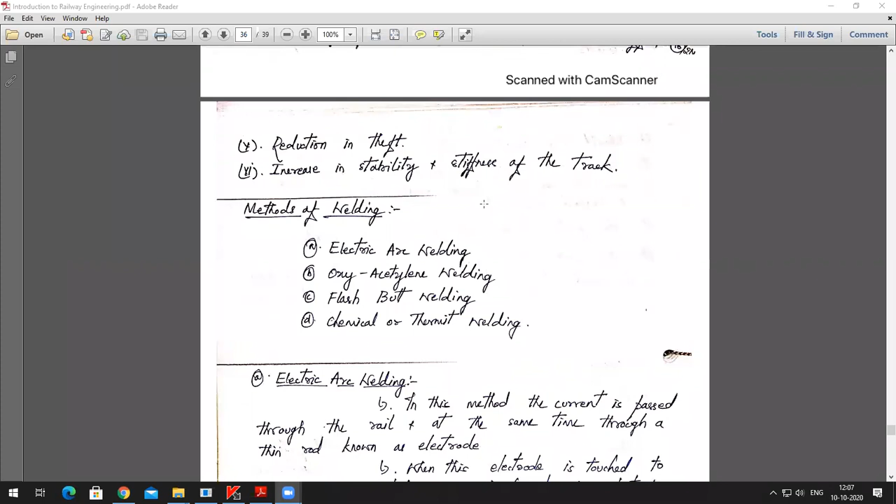Okay, so today we were supposed to discuss the various methods of welding of rails. In the previous class, if you remember, we had discussed the purpose of welding of rails, and then we discussed the advantages of welding. Now we shall be discussing the methods of welding that are available with us.

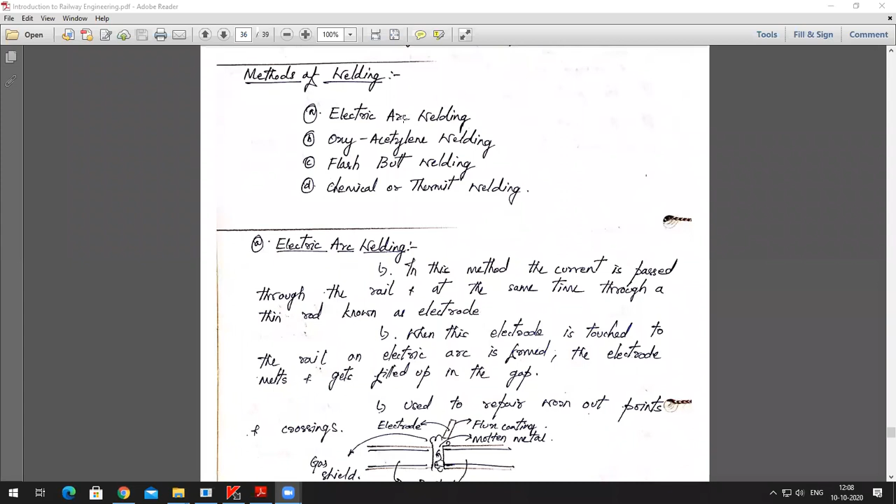Right. So there are basically four popular ways with which the rails can be welded along a railway track. The first one is electric arc welding. Second is oxyacetylene welding. Third, flash butt welding, and then chemical or thermite welding. So we shall be discussing each one of these in detail in this class. Okay, so let us begin with the first one, that is electric arc welding.

So what actually happens in this method is that the current will be passed through the rails and at the same time through a thin rod, which is popularly known as the electrode. So when this electrode is touched to the rails through which the electricity is already passed, the electrode actually melts and gets filled up in the gap between the two rails.

That heat would be more than enough to melt the metal that is there inside this electrode, and that's how the molten metal gets filled in the gap, and then it will start binding these two rails together, and then the excess material will be chipped off or it will be ground.

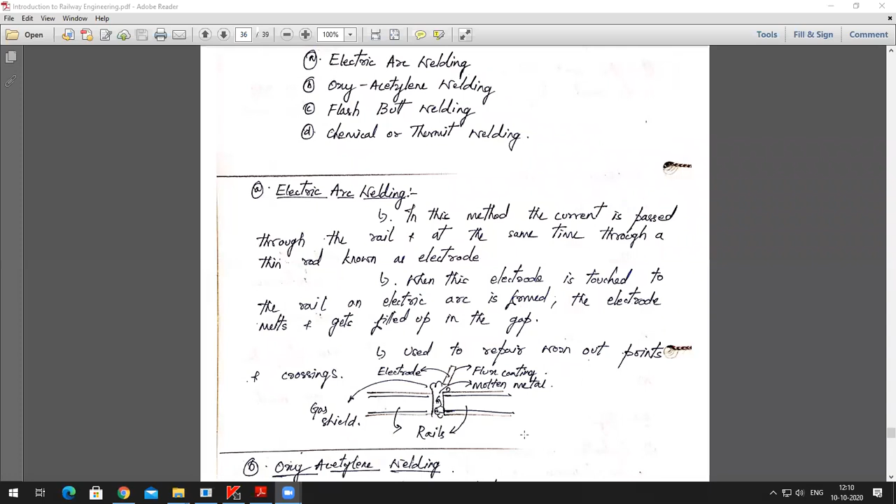Okay, so this technique is basically used in joining the rails, and it is very convenient to even repair worn out points and crossings, or even sections of the rails which have deteriorated over time. All right, so this is about electric arc welding. I'll try showing you a video on how this electric arc welding is actually done.

Is everyone able to see the video? Yes, sir. Is the audio of the video also audible?

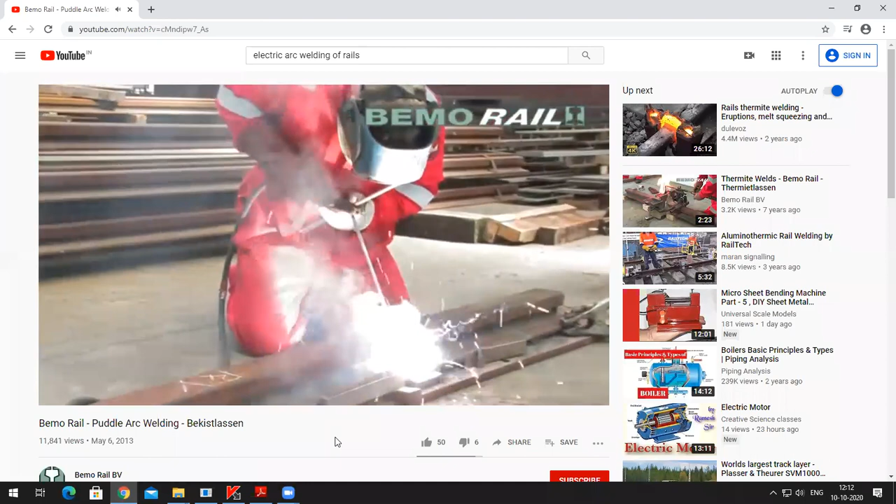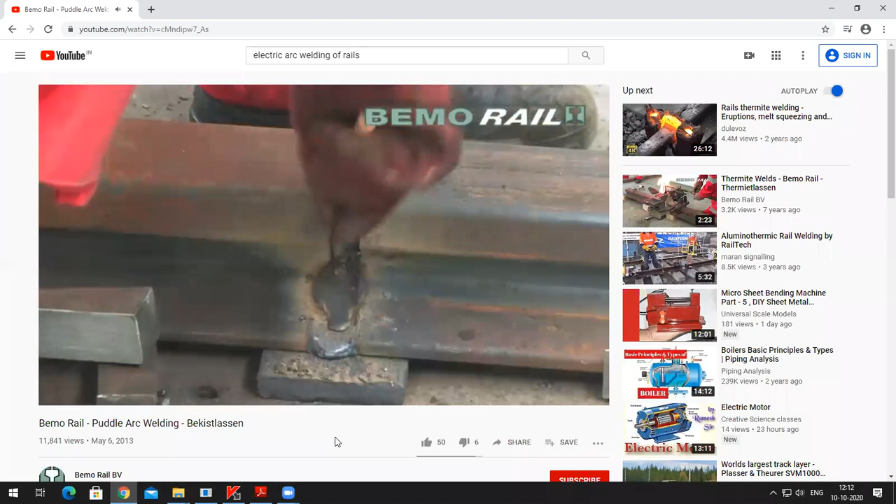So these are the electrodes. See, that's how the metal will be filled in stages, and those are the molds which will be put so that the molten metal doesn't fall apart.

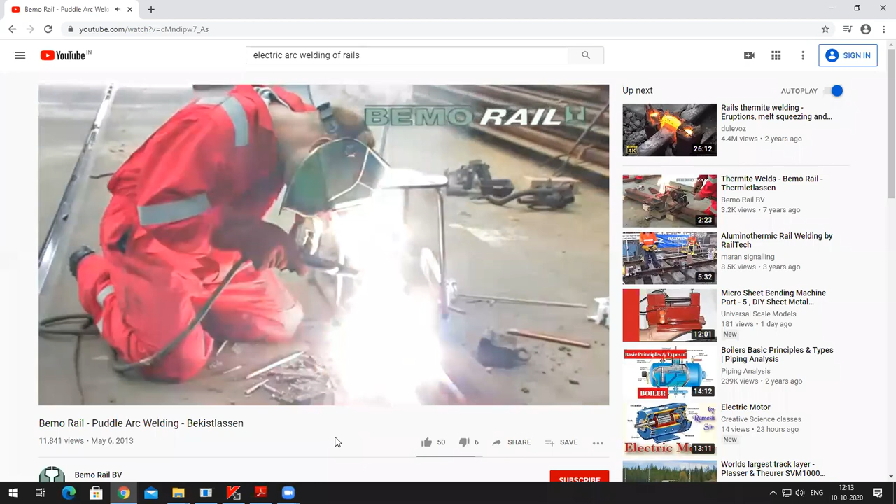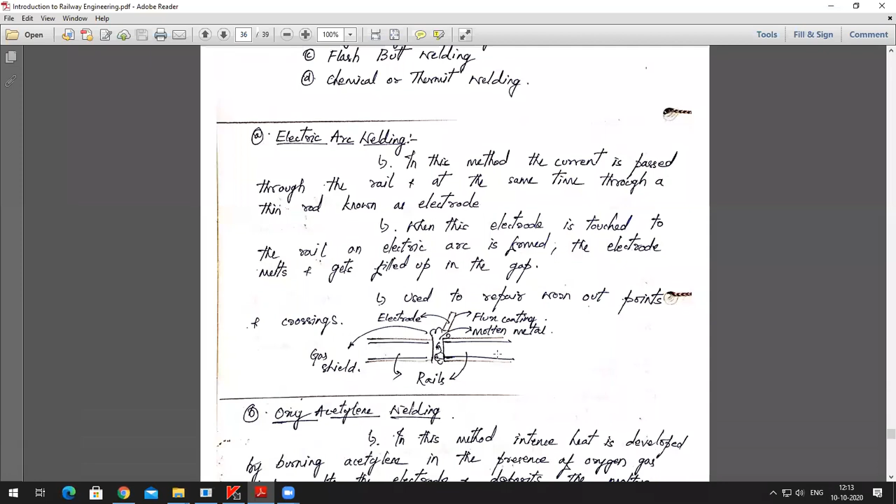So you could see how the electric arc welding is done by using the packing that we provide on the side, so that the shape of the head and the web gets retained. Okay, so that was about electric arc welding. Next is what we call oxyacetylene welding.

So in this technique, a huge amount of heat would be developed by burning acetylene in the presence of oxygen gas, which will melt the electrode, and it deposits the molten metal in the gap between the two rails which are supposed to be joined. Okay, so this is similar to electric arc welding. I'll just see if there is a video on it.

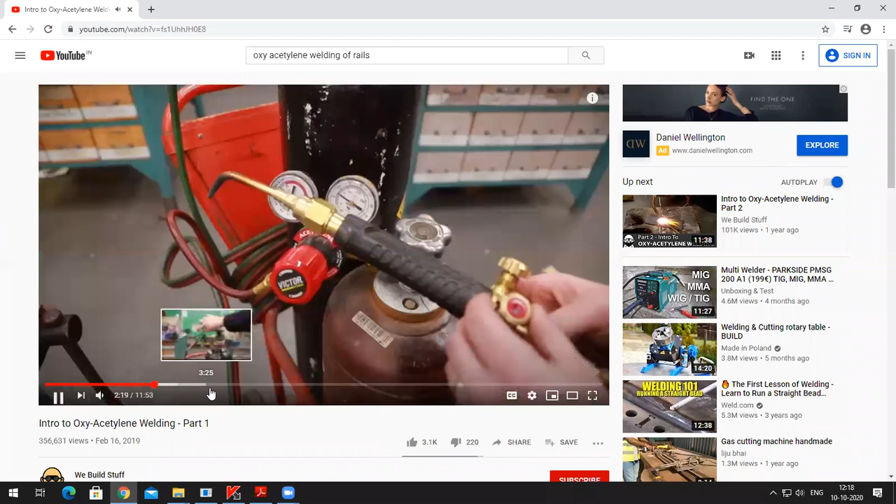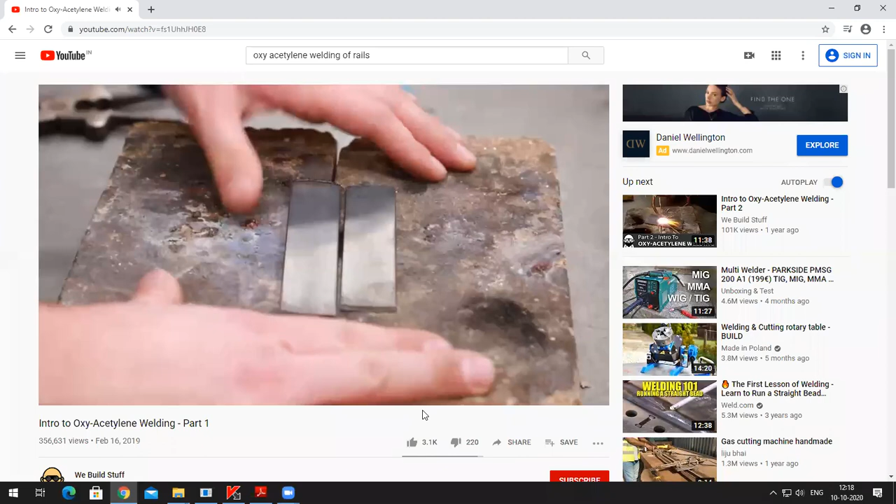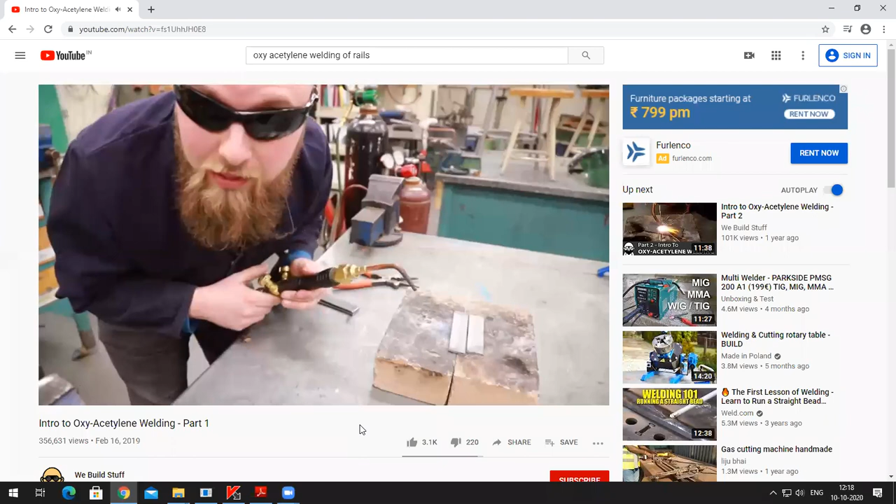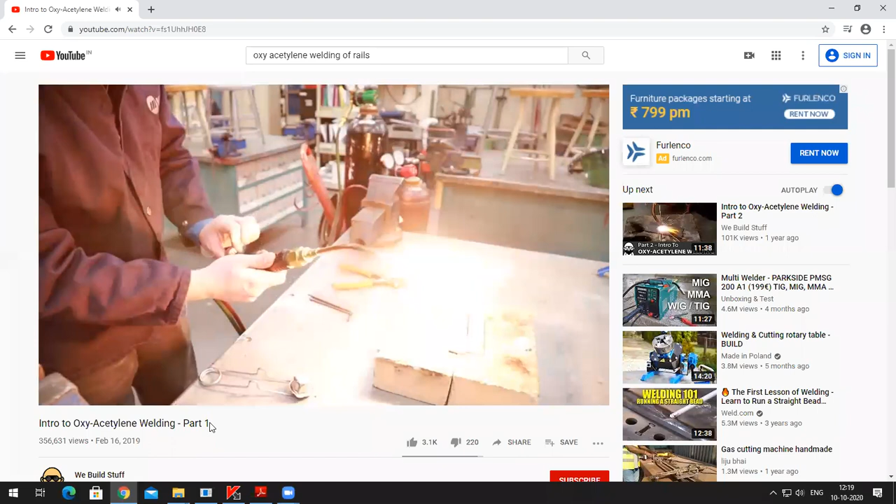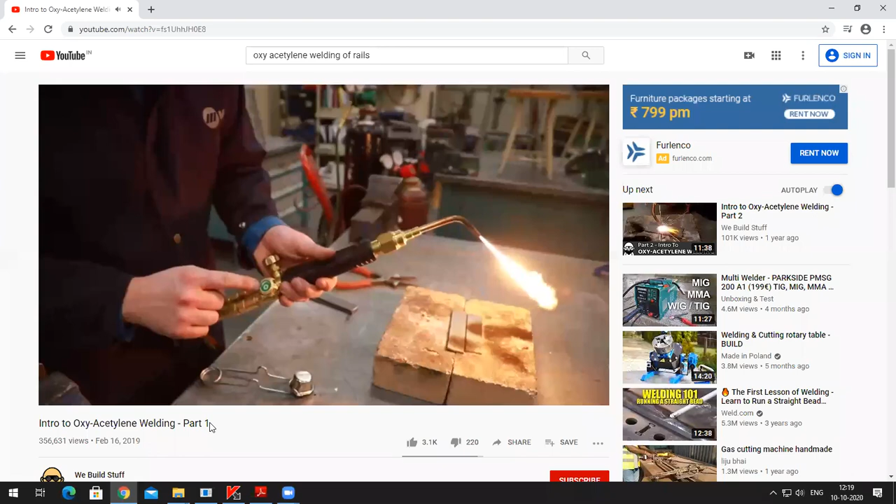In this case, you're doing flat bar. So I'm going to open that up. I get a nice roar. I don't have a special number for this. Beautiful. Next, we're going to open up our oxygen and add some oxygen to this mix. Watch carefully what happens to the flame.

Now, if you look at it, it looks like we have 2 different cones here. We've got a very bright one, and we have a longer one here. Don't try to touch it, but you can get pretty close without feeling any heat. I'm not going to purposely do that though. All right, I'm going to adjust some more oxygen until that one cone gets nice and tight. I've just set the exposure on the camera down a little bit so you can see the 2 different cones.

When you're first assembling that, add your oxygen, and you see 2 different colored flames. Good. A short bright one and a long one there. I'm going to add more oxygen until I have a very nice little cone. It's maybe less than a centimeter long.

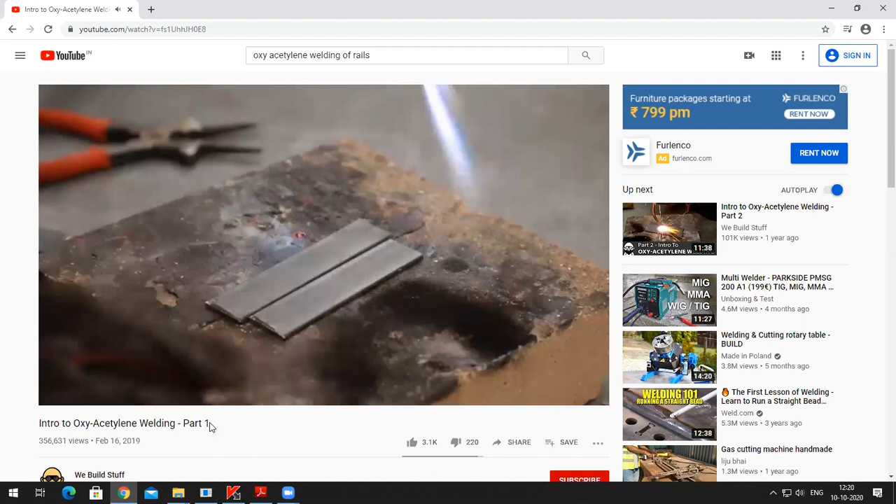Correct. So I have my flat bar set up with a very slight gap in between. I want to have a little bit of a gap to allow the metal to penetrate when it gets welded together. I'm going to start by tacking both ends, and then I'm going to do a fusion weld. To tack first, I'm going to heat it up and hold my torch on about a 45-degree angle and kind of zigzag between the 2 pieces while concentrating on one area.

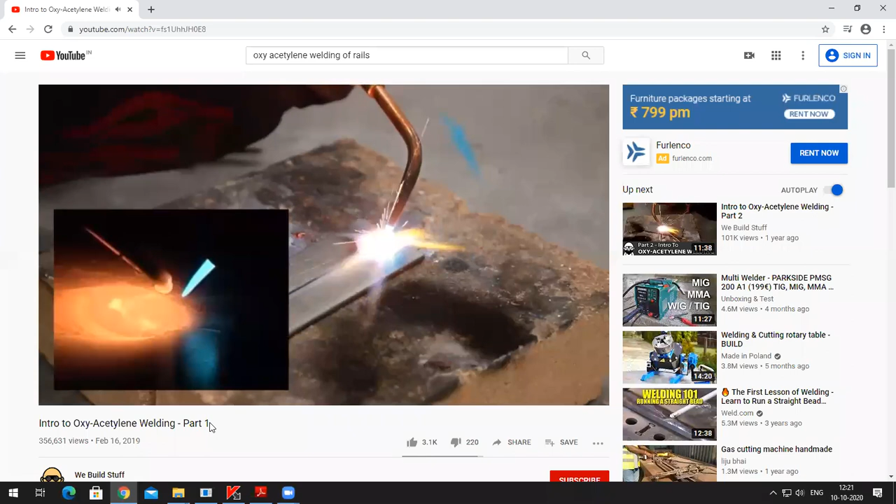If this is taking too long, you can increase the pressure and get more heat. What we're looking for is both pieces of metal basically turn molten. You'll see it start to get shiny on both sides, and those 2 shiny parts will join together into one part. Back and forth, and there we have now a little bump. I'm going to do the same thing to the other side.

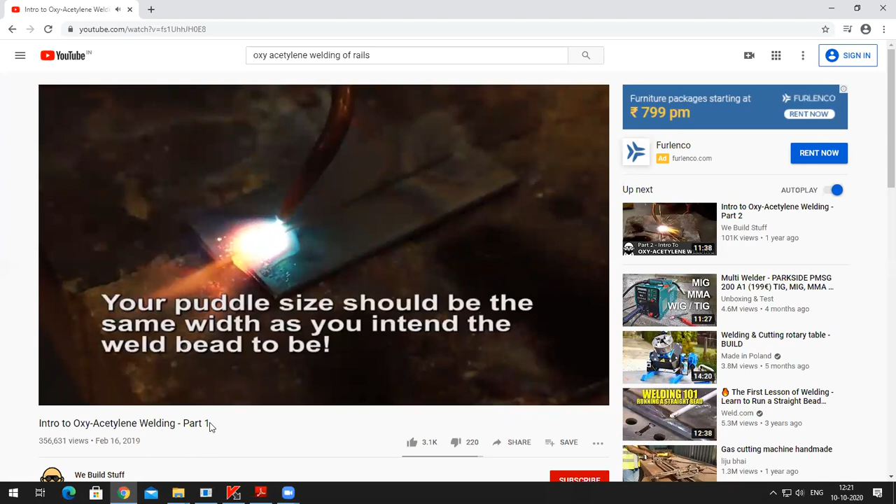I've dropped the exposure on the camera so you can get a better look at what's going on here. So I'm holding my torch on about a 45-degree angle, zigzagging back and forth between the 2 pieces. I'll hold the torch on the other side so you can see better. I want to get a nice little puddle. Back and forth between the 2. I'm just hovering above the metal. I don't want the torch to actually touch the metal.

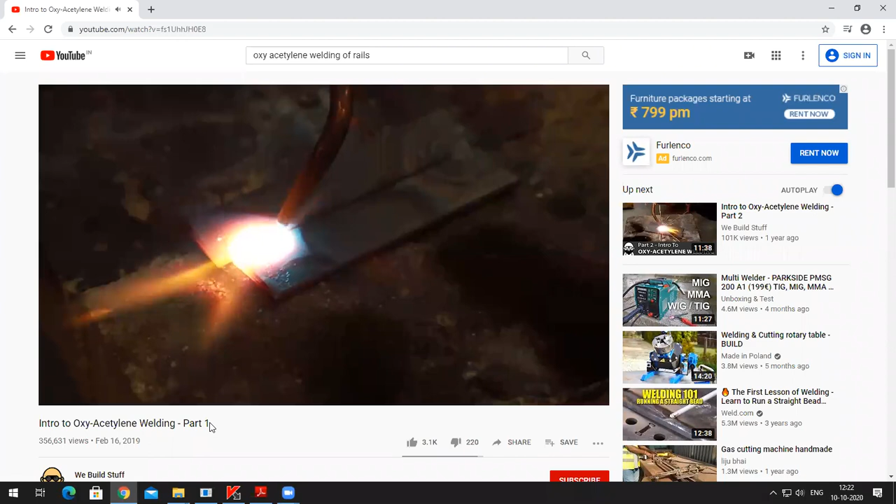My puddle should join soon. The 2 sides are getting molten. I want those 2 little puddles there to become one. Wait for that moment. Little circles or zigzags. There it is. See that? Now we have a nice little joint.

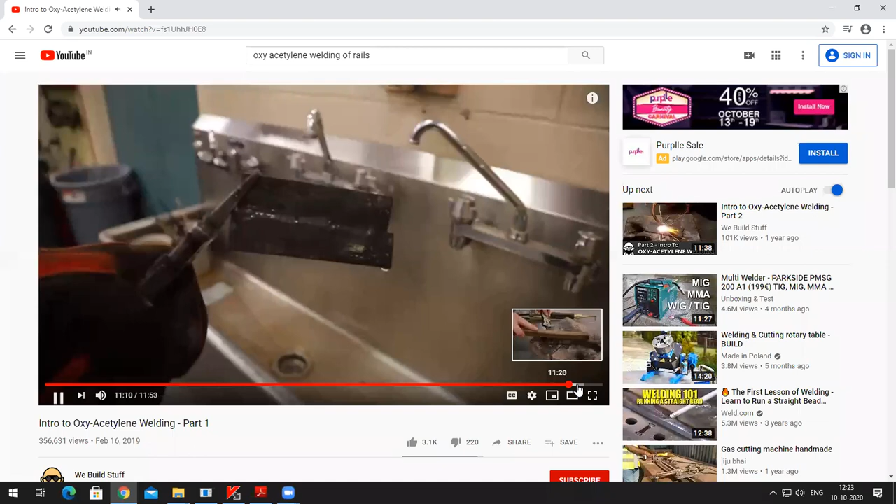Disassembling first, A, and then O. You can take this to a bucket of water or to the shop sink to cool it, but when we're just practicing, you can take a closer look at it. If you want to do more penetration, you can put a little bit more space in each one.

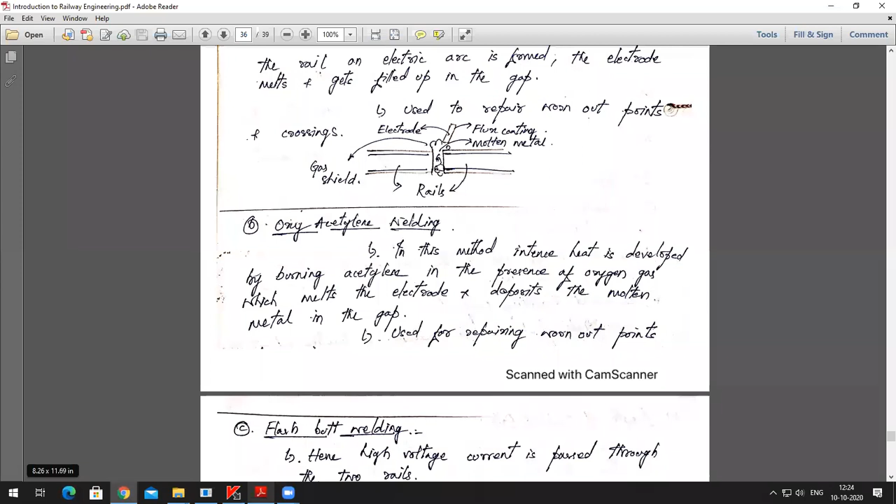So this is how the oxyacetylene welding is done on rails also. In this particular case, what he has done is he has tried to move the metal from one point to the other point so as to just use the same material to join the two metals together. On the other hand, what you can do is you can use the electrodes as it was shown in the previous case. Okay, and that electrode will be melted because of the torch that was shown here, and then it gradually fills up the gap between the two rails. Okay, so that is about oxyacetylene welding.

Next we will be moving on towards the next method, which is called flash butt welding. Now what happens here is a huge voltage would be passed through the two rails which are supposed to be joined, and the two rails which will be carrying a huge amount of electricity will be brought close to each other, because they both will be of opposite charges, positive and negative. So the positive charge will be sent through one rail, and the negative charge will be sent through the other rail. Then when they both are brought close to each other, there'll be a huge amount of heat that will be generated because of these two opposite charges.

So when they are brought close to each other and they are pressed with each other at a very high pressure, say around 20 tons force, that amount of heat which gets generated between these two rails will be more than enough to melt the metal that is there at the section. And then if it is held for a certain period of time, both rails are expected to be joined together.

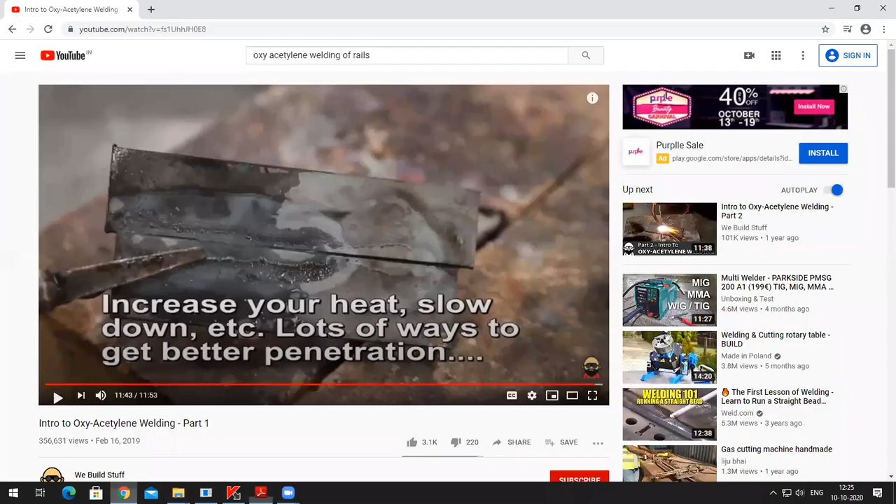Okay, so normally to have this kind of a welding process, you need a huge setup. It cannot happen at the site, but you can have it at the welding plants close to the site, so that the welding can be done and then carried to the site and placed. Okay, so I'll just try searching if there are videos on it.

So you can have a look at this video. This is specifically for rails. There'll be a very huge plant which will be carrying out this work. Civil Engineering Bitz.

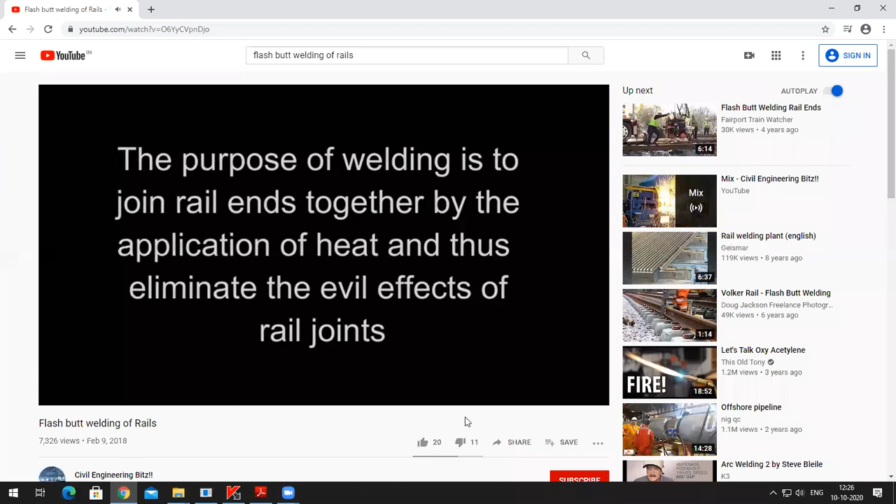Flash butt welding of rails. The purpose of welding is to join rail ends together by the application of heat and thus eliminate the evil effects of rail joints. A. Gas pressure welding. B. Electric arc or metal arc welding.

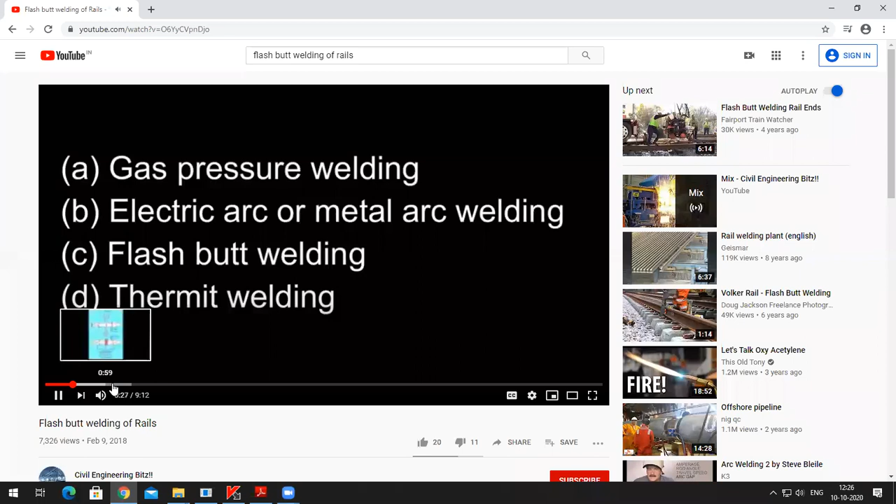According to operation requirements of a flash butt welding machine, rail ends and both sides of rail and surfaces to be touched by electrode of the flash butt welding machine shall be derusted. The rail ends are then brought together in the flash butt welding machine and longitudinally and vertically aligned by suitably adjusting the machine. The rail ends are then welded in the flash butt welding machine.

After welding, step of the weld is checked with the step gauge. After completing the welding and pulling of the rail welded joints, the grinding machine shall be used to grind the weld.

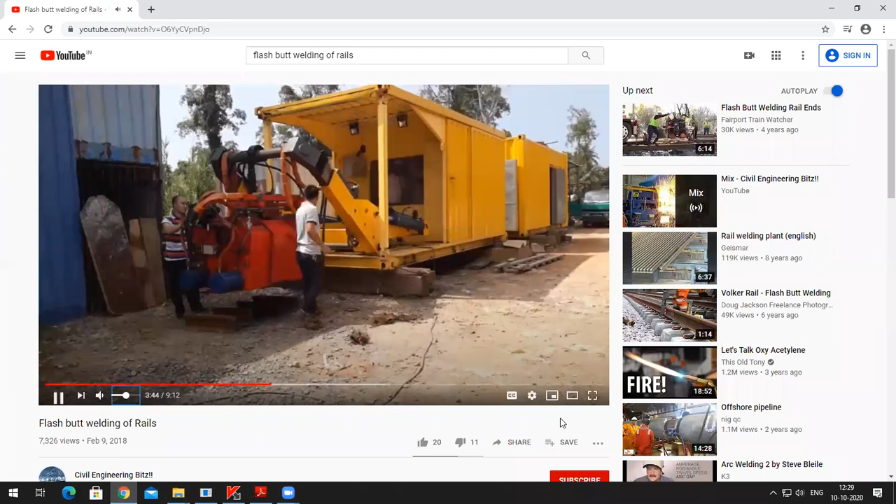So actually that's the machinery. It's a small scale machinery which does the flash butt process. But actually in the factories, you will be having a very huge similar such machinery which will be doing the flash butt welding. That's how the flash takes place.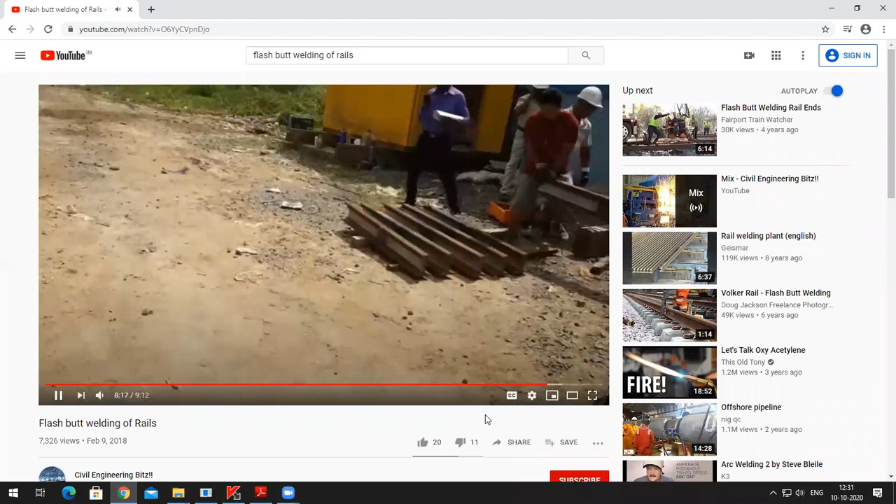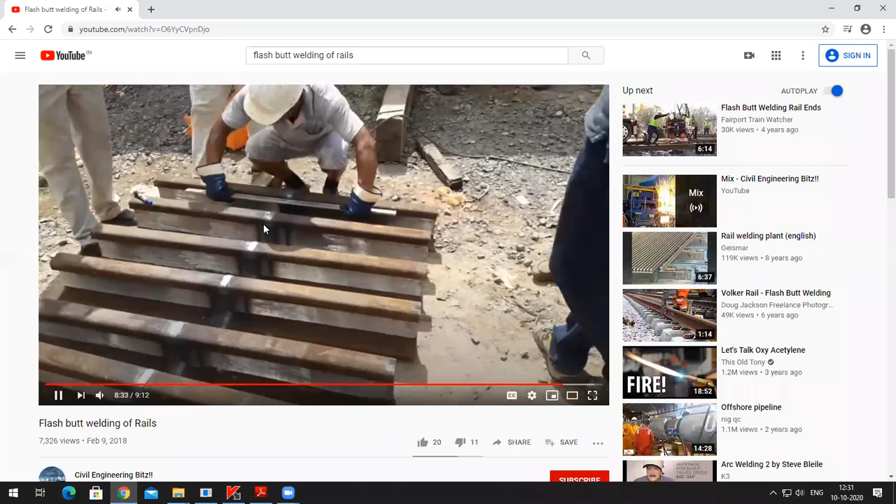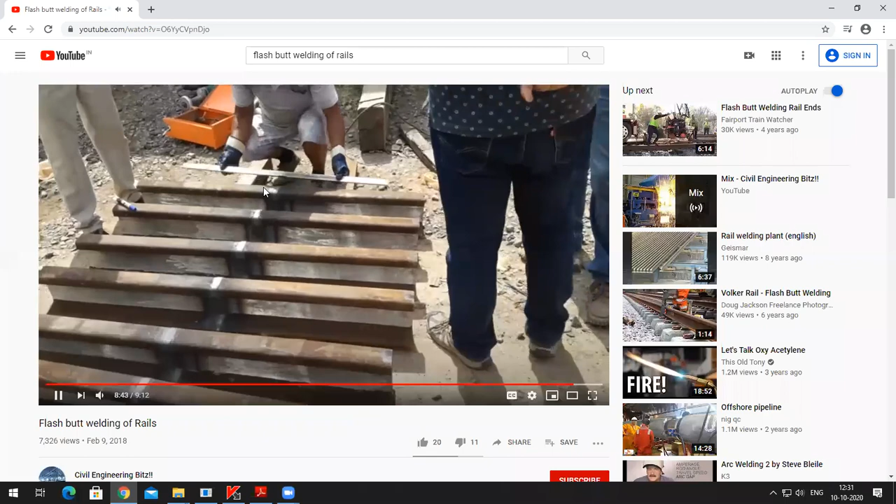See, this is how the welding will be done by using flash butt technique. That's how they check the levels. And in case if there's any variation in the levels, then they'll be using the grinding machine to grind the surfaces. Okay, so this is normally called as the straight edge. So straight edge also might be fitted with the level tubes to check the levels. So this is how the process would be. Okay.

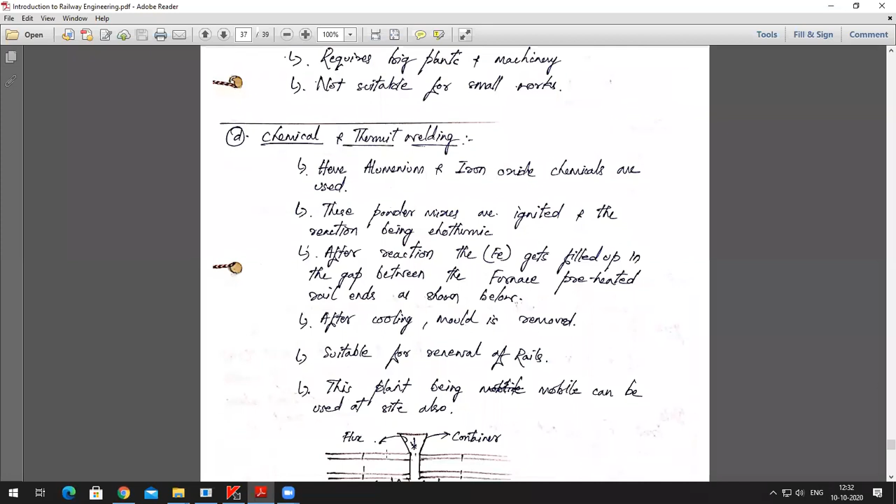Then we have the chemical and thermit method. Now, normally in this technique, there'll be aluminum and iron oxide chemicals or minerals being used. So they will be in the powdered form. So that mix will be used to ignite and create reaction between the minerals that are there. Usually this reaction which takes place between these two will be exothermic in nature. Exothermic in nature means it generates heat while it gets reacted.

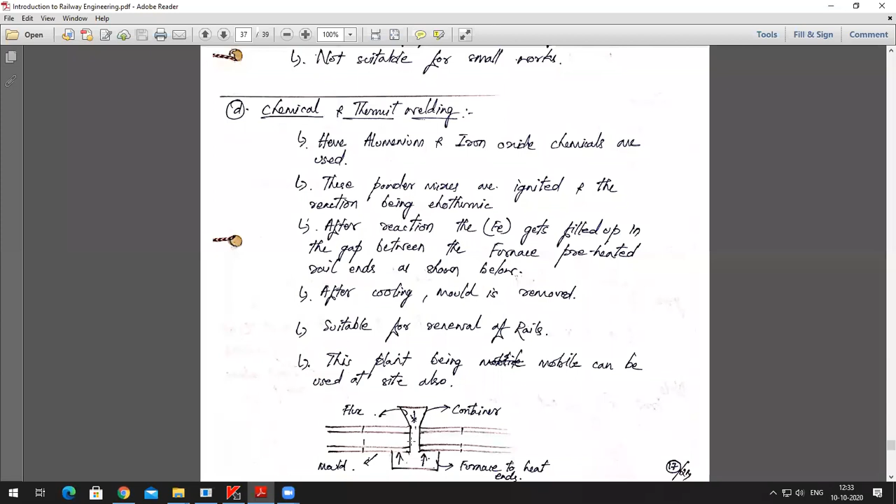So after the reaction has taken place, normally iron oxide or iron or suitable alloy will be filled up between the gap, and then the furnace will be heated. And this furnace, you can see that the furnace would look like this. Okay, so there will be a container at the top also. You will be putting all those things inside, and the metal gets heated up and it gets filled in within the gap. So that's how it looks like. So I'll quickly try showing you the video of it.

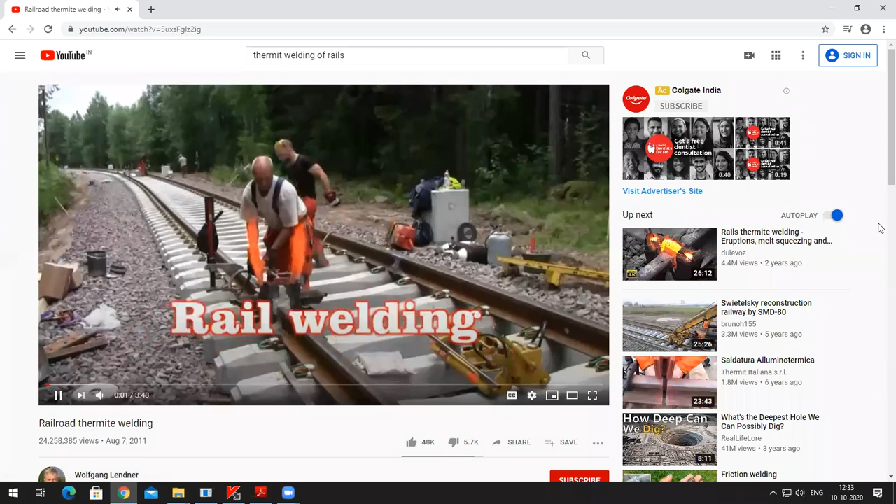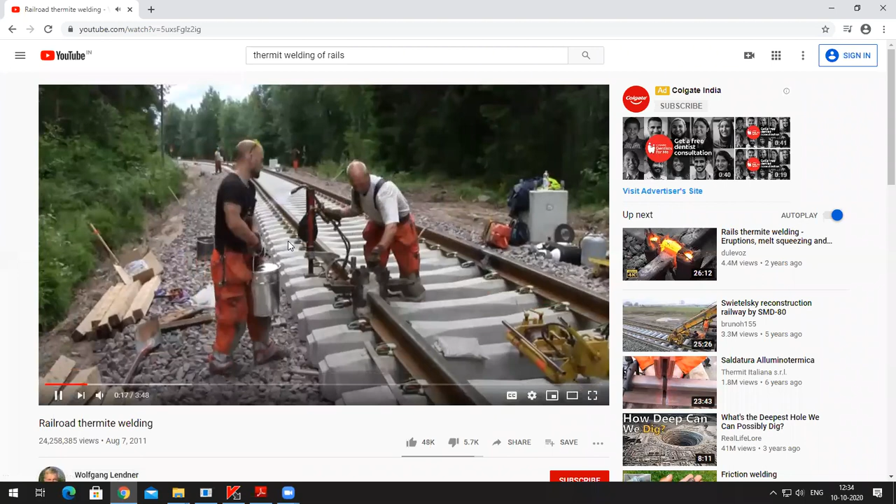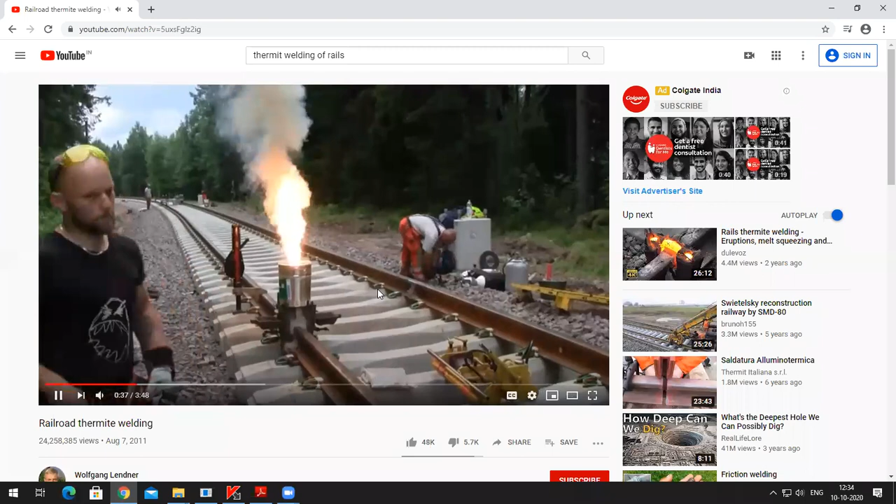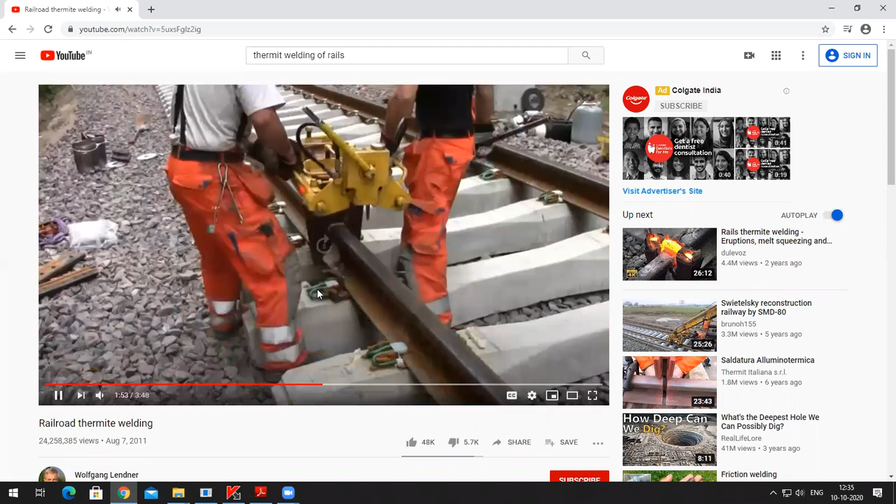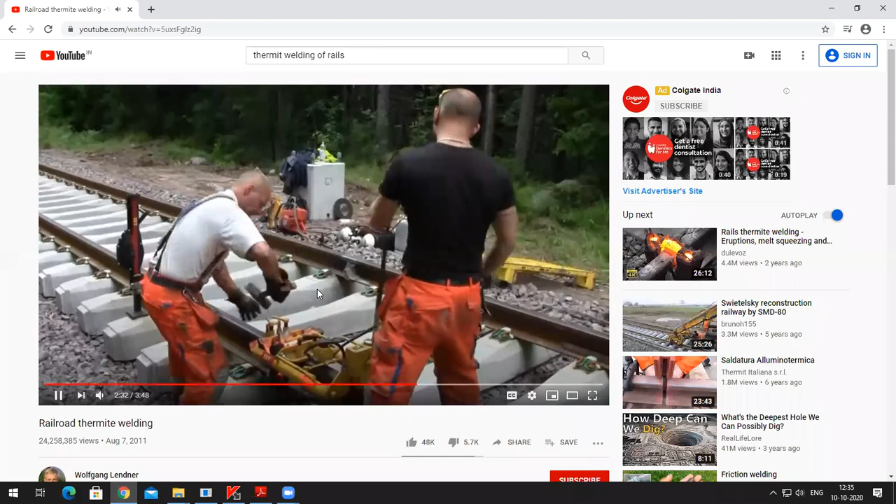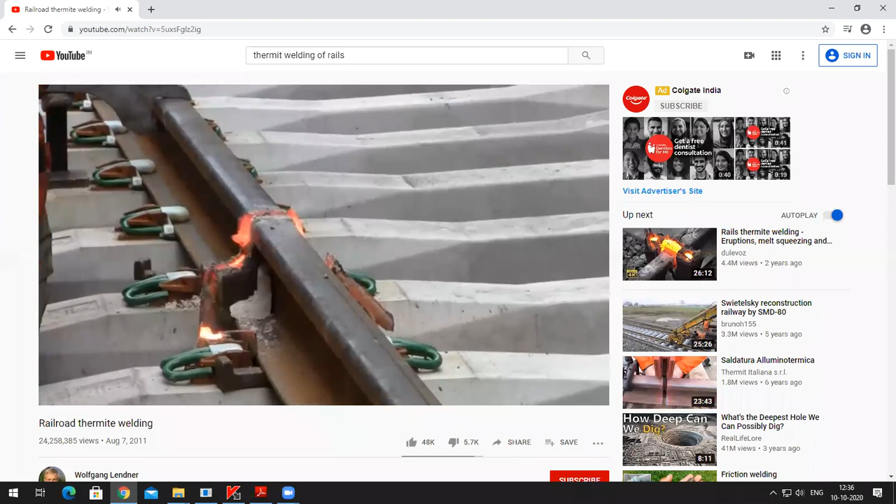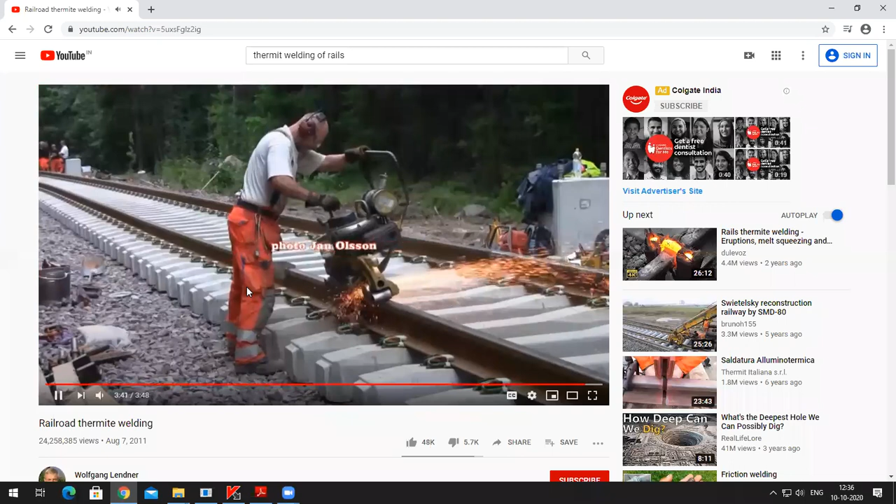That's how they remove the mold out. And once it is removed, the metal would look like this. The excess would be chipped off like this. And that's how the grinding will be done. So that was about the chemical or thermite welding. So most of the places they use this technique to do the welding process.

I think today's class was much clear to you about how the things are practiced at the site and in the plant to weld the rails. Was it clear? Yes, sir. Yes, sir. Yes, sir.

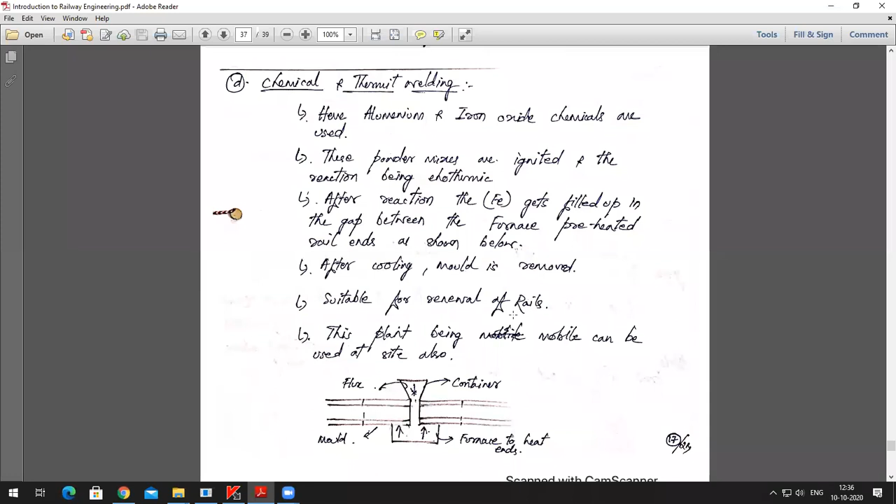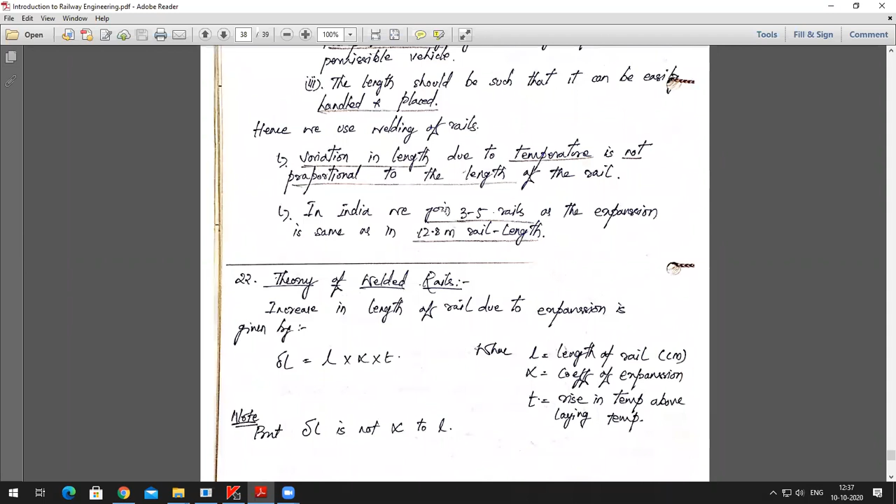Okay, so I think I'll stop here, and it's your job to look into the textbook and read the things in detail. In the next class, I'll be discussing about the length of welded rails. There will be optimum length of welding of rails being done, which need to be practiced, and I shall be discussing two simple examples based on it. So once that is done, then this particular chapter would be complete. Okay, is that clear?